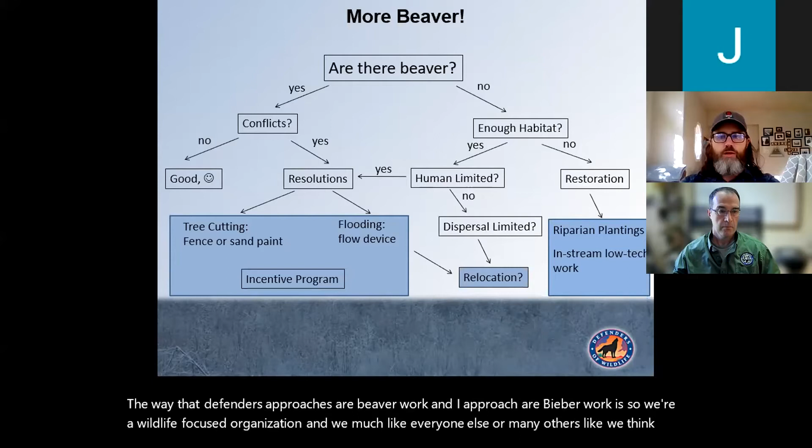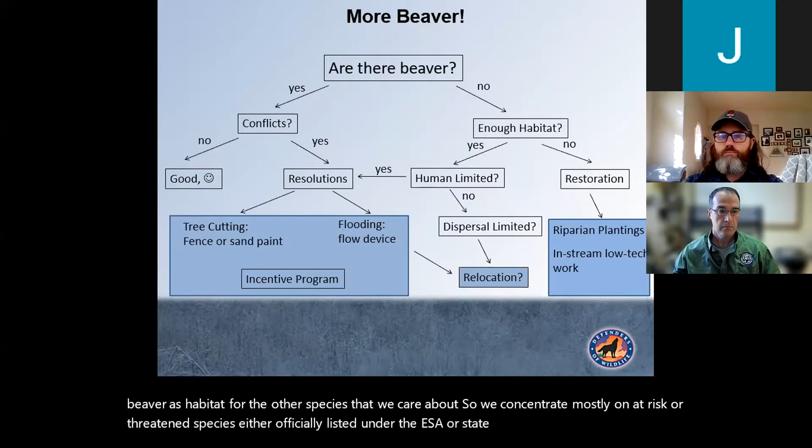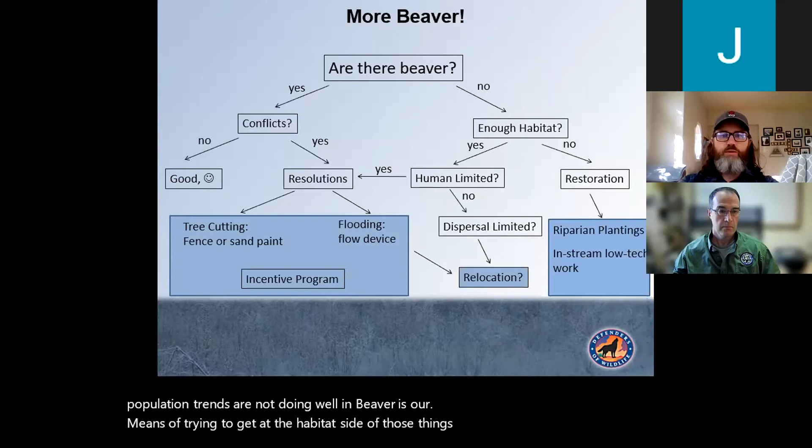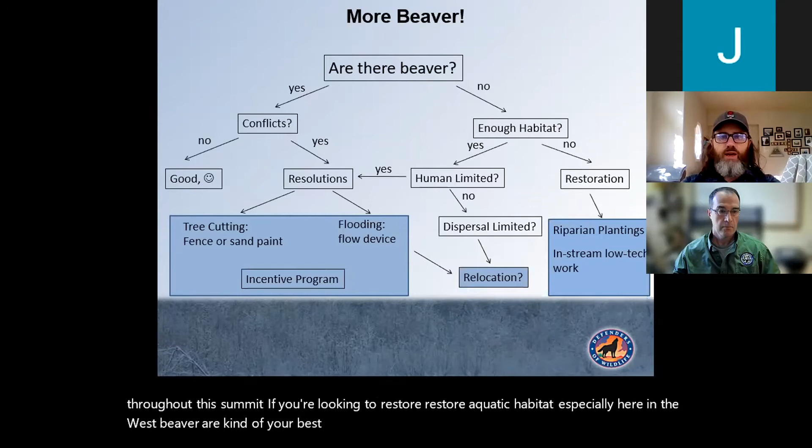The way that Defenders approaches our beaver work and I approach our beaver work is, we're a wildlife focused organization, and much like many others, we think of beaver as habitat for the other species that we care about. So we concentrate mostly on at-risk or threatened species, either officially listed under the ESA or state listed, or whose population trends are not doing well. And beaver is our means of trying to get at the habitat side of those things. Because as we've learned throughout this summit, if you're looking to restore beaver or restore aquatic habitat, especially here in the West, beaver are your best choice, your best ally from both a cost and effort perspective.

So today I'm going to focus mostly on this side of my diagram here, places where we have beaver and we have conflicts, and try to walk you through some of those common conflicts and common solutions as we move forward. And then if we have time, I'll speak a tiny bit about relocation, but it'll be super brief.

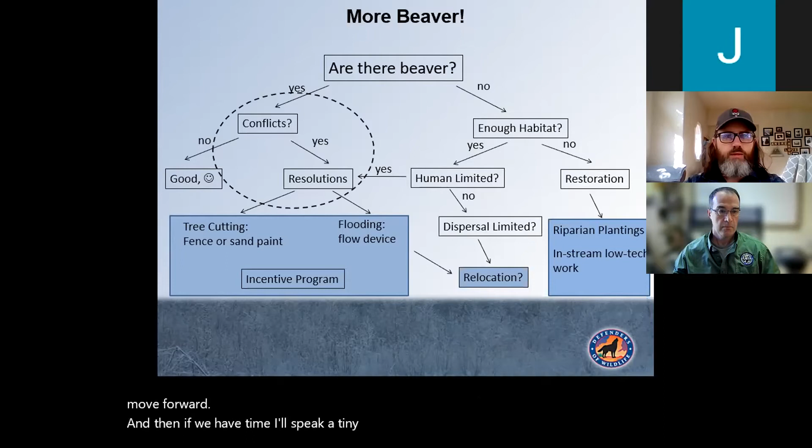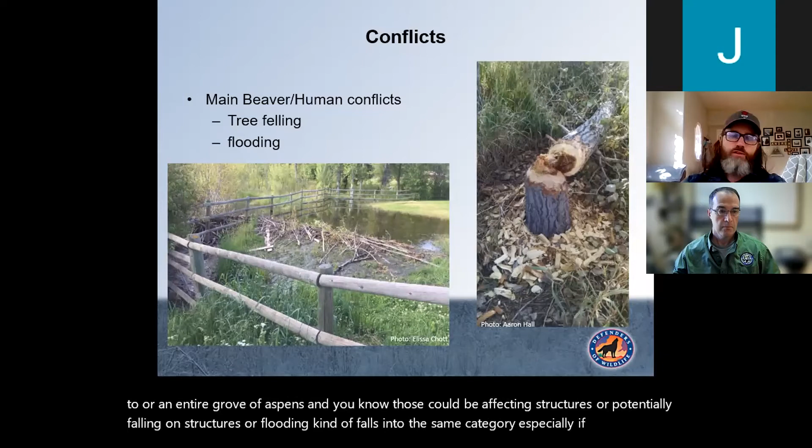So beaver conflicts tend to fall into 2 main categories. It's either tree felling, where they're taking out ornamental trees or trees that people have a personal connection to, or an entire grove of aspens, and those could be affecting structures or potentially falling on structures. Or flooding, especially if you're flooding out infrastructure, such as this picture on the left of someone's backyard being flooded. But let's remind ourselves, why are beaver doing this?

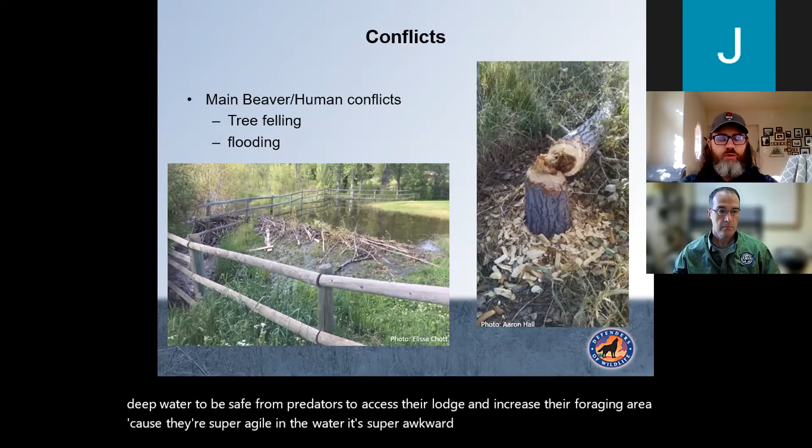Beaver are trying to create themselves a pond, and they want that pond so they can have some deep water to be safe from predators, to access their lodge, and increase their foraging area, because they're super agile in the water and super awkward on the land. So the bigger, deeper pond they can create keeps them safer and gives them more access to forage. It also creates that feedback loop: more wetland area creates more forage and willows for themselves.

So good news on the tree felling side of things, there's some fairly straightforward and simple things that we can do, primarily just fencing. But it does matter, the type of fence that you use. You need a heavy-ish gauge wire, something in the 12 to 14 gauge range. It's going to stand on its own. Chicken wire, chicken fence will not work. They can actually chew through that.

You need to put those fences away from the trunk of the tree so you don't girdle it. Give that tree a little bit of room to breathe and room to grow. In areas where you might get high snowpack, like here in the Rockies, those fences need to be about 4 feet tall. Because if you have a 2-foot fence and you get 2 feet of snow, a beaver can just climb right up on top of the snow and get to your trees. And we do recommend that you stake those fences into the ground so beaver can't get up underneath them and access the trees that way.

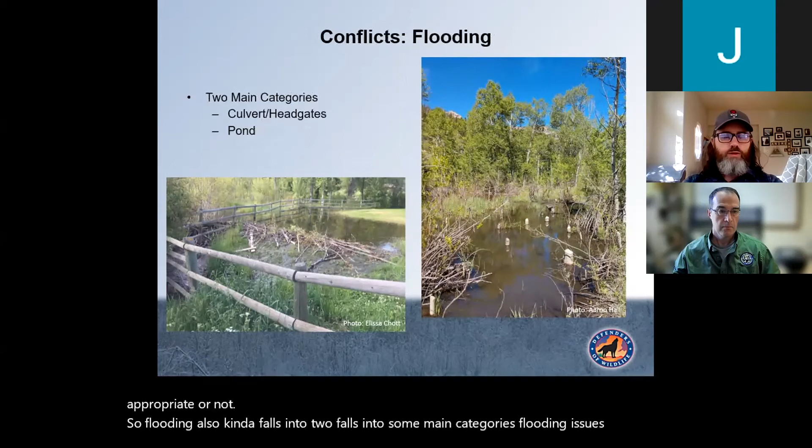So flooding also kind of falls into some main categories. Flooding issues usually either are associated with culverts or headgates, or just general beaver ponds, beaver doing their thing. There are, again, some simple solutions.

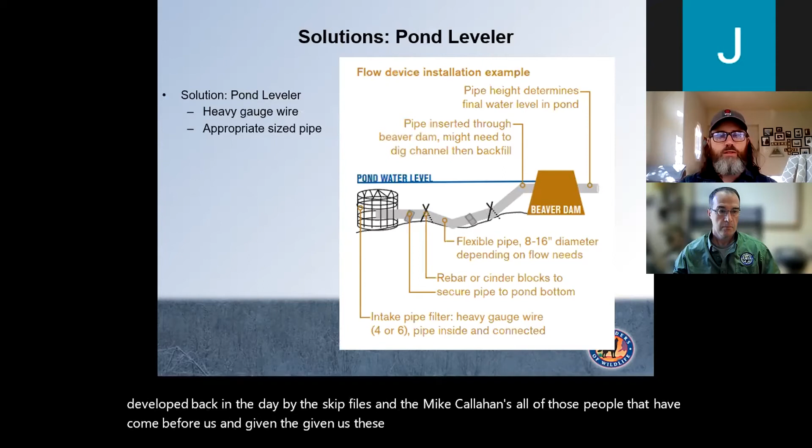And just to point out, all of these solutions and conflict reduction things that I'm recommending are all methods developed back in the day by the Skip Lisles and the Mike Callahans, all of those people that have come before us and given us these methods and tools to work with to reduce beaver conflicts. And I'm so grateful for all of those people that have come before us and everyone working now, building on those principles and advancing the field and really making it more accessible to everyone. So this is just a basic, simple pond leveler device.

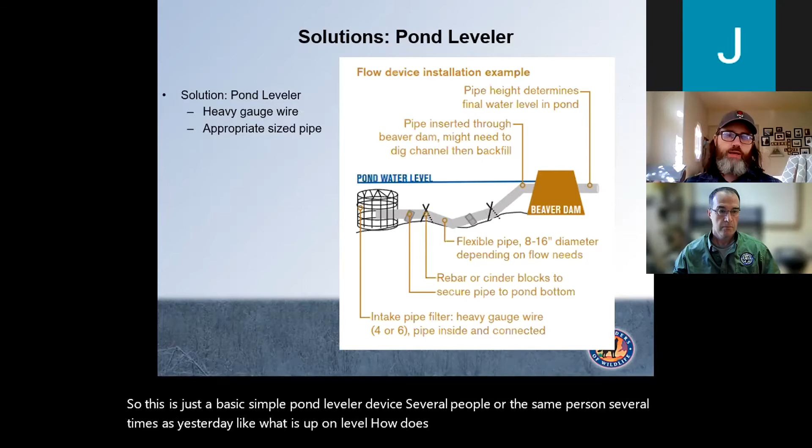Several people, or the same person several times, asked yesterday, what is a pond leveler? How does it work? And as someone responded yesterday, it's basically just a pipe through a dam. But the sneaky part about it is, if you put a pipe through the dam, the water level gets set at whatever level you set that pipe. But then if you put a pipe way out into the pond and put a filter around it, the water is actually coming from way out here in the pond.

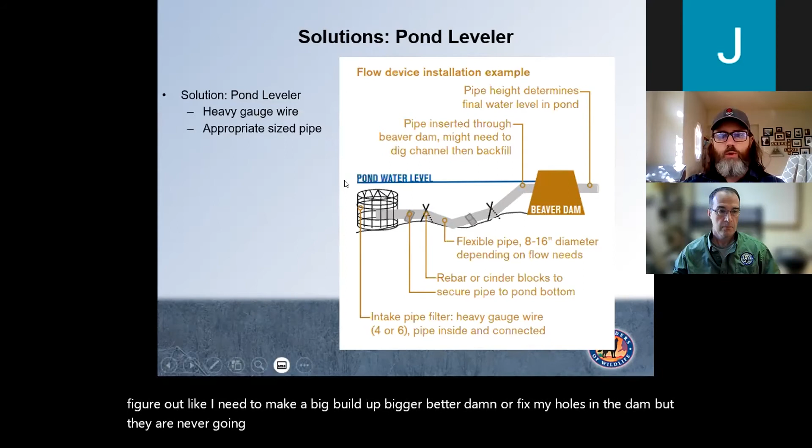So the beaver might do a ton of work at the dam, trying to figure out, oh, I need to build a bigger, better dam or fix my holes in the dam. But they are never going to affect the water level because the water is coming from way out here in the deep part. So that's just how it works. If you put that filter out there far enough and deep enough and with a big enough filter on it, the beaver will never feel it, they'll never find it, and therefore they won't plug it up.

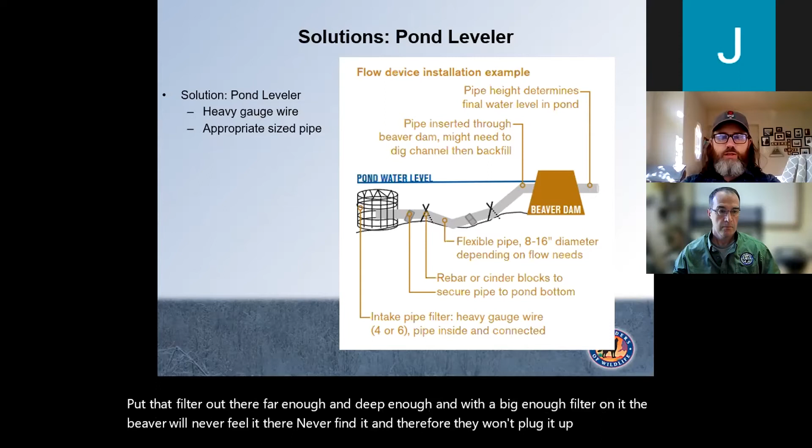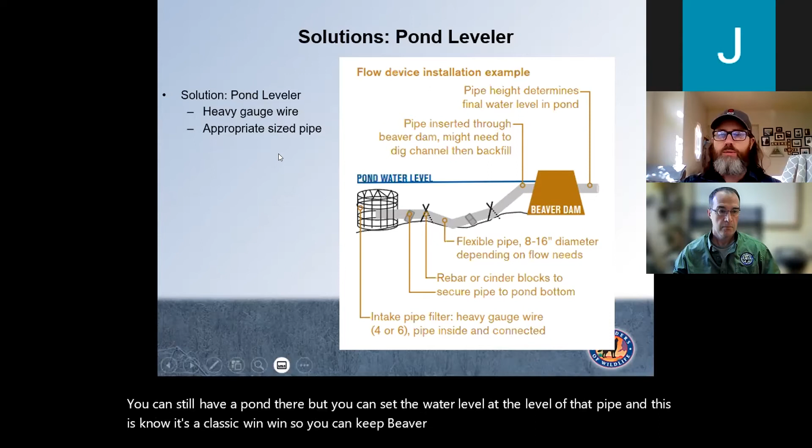So you can still have a pond there, but you can set the water level at the level of that pipe. It's a classic win-win. So you can keep beaver on the landscape, but help to minimize their flooding. And here's a quick example, again, from work up in Montana with NWF and Clark Fork, of a pond leveler being installed. You can see the filter out here. You can see the pipe coming through the dam right here. So it can be that simple.

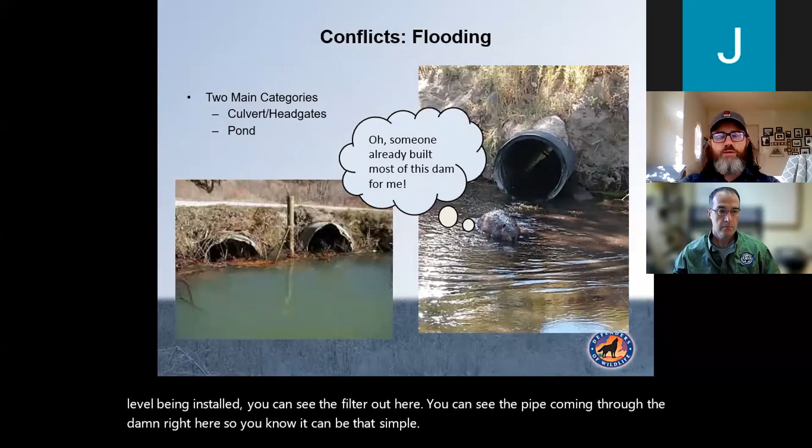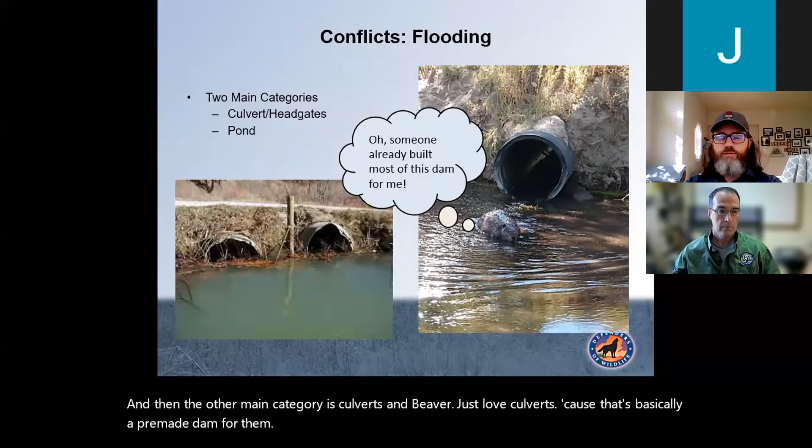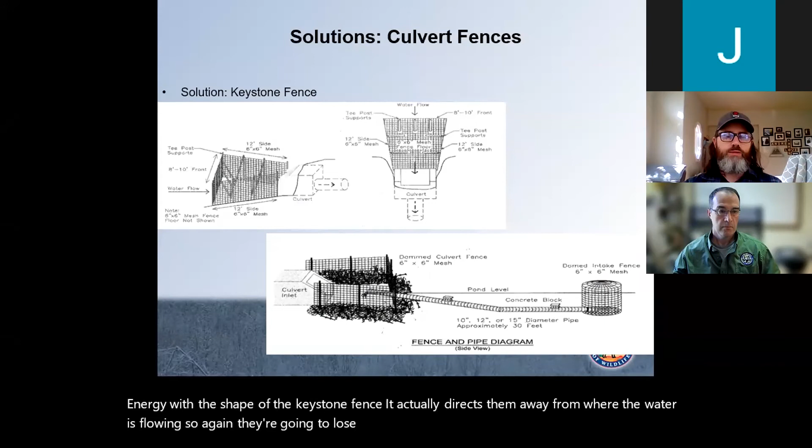And then the fence and pipe situation is just a slight twist on the keystone fence. So maybe you don't have enough room to put in a really big keystone fence, or you're just super concerned that the beaver are going to dam the heck out of it. So that's great. Build them a fence, and they can build whatever dam they want on that fence. And then if you have almost a pond leveler type system connected into that fence, the water is going to come from out in the pond and be protected, and they're never going to find it. So they can build whatever dam they want around this fence near the culvert. The water is coming from way out here in the pond, and they will not find it.

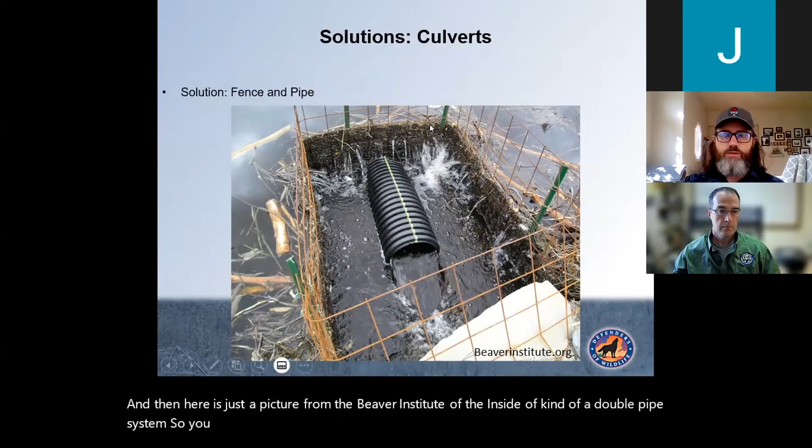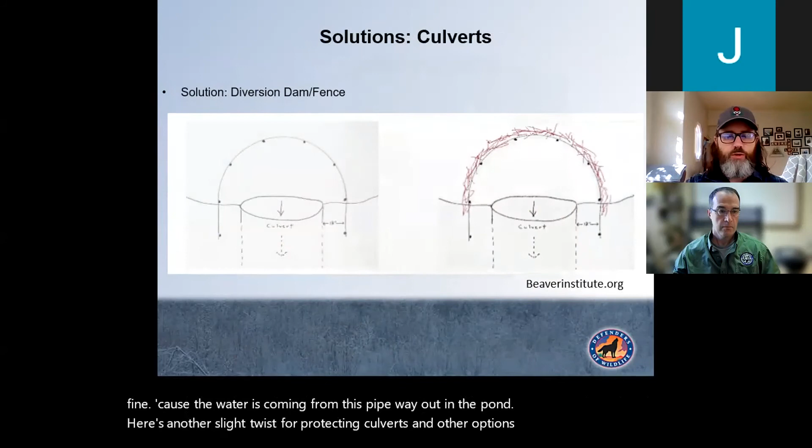And then here's just a picture from the Beaver Institute of the inside of kind of a double pipe system. So you can see the beaver has done a great job of damming around the fence, but that's fine because the water is coming from this pipe way out in the pond. Here's another slight twist for protecting culverts. Another option is to just make the beaver build the dam where you want them to. You can see in this picture, if you build them kind of a starter dam and then get them to continue building on that dam, the culvert actually stays clear because the dam is out here and not blocking the culvert. So yet another solution.

I just want to point out, it's really important that these concepts and these techniques are applied correctly. And it's tricky because the general concept seems simple, but then the application is really site specific. So here's some examples of projects I've been contacted on that are not quite installed properly. This one on the left is kind of a keystone fence, but they decided to build a rock dam on the inside of it. That's not the best practice.

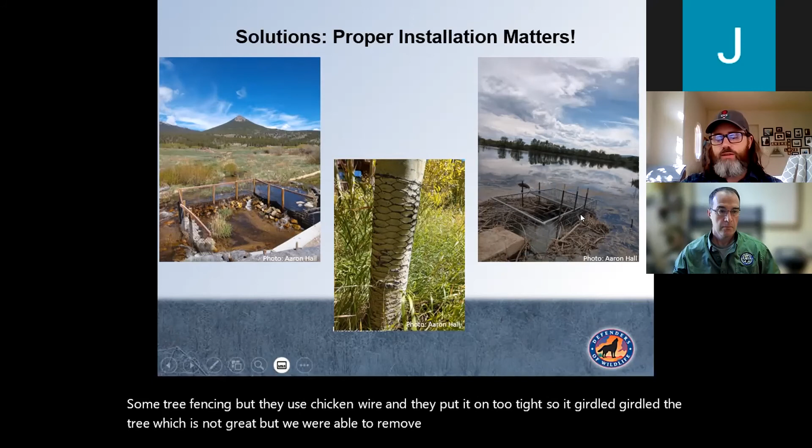This one in the middle is some tree fencing, but they used chicken wire and they put it on too tight. So it actually girdled the tree, which is not great, but we were able to remove all those. And this one on the right is an attempt at a double filter system where they got the fence part right, but they didn't use big enough pipes to put out into the water. And they all clogged up because there were no filters. All three of these have been remedied and they're working well now.

But again, just to point out that it really matters how you install these, because as was mentioned yesterday, and as I feel really strongly, we want to avoid a negative feedback loop of coex. So if people see devices that are installed improperly and not working, they tell their friends and you kind of get that negative feedback loop of, oh, well, these things don't work and we shouldn't bother trying. So it's really important that we have good examples and good installations that are doing what they should and functioning properly to create a positive feedback loop instead of a negative feedback loop.

If you happen to live in Colorado, New Mexico, Wyoming, or Montana, Defenders actually has a program to help pay for these flow devices. So in general, we'll cover half the cost up to a certain threshold of these projects. It just depends how much money I currently have in the budget for these. And that is my way and our way of trying to scale up our impact on the ground. Now, I'm only one person. I work in the entire Rockies and Plains region. I obviously can't be hands-on for every site that needs some sort of coexistence.

So this incentive program is one way that we think we can encourage more use of these devices and scale up their presence on the landscape. So if you want more information about that, please reach out to me and I'll drop the link to this in the chat as well.

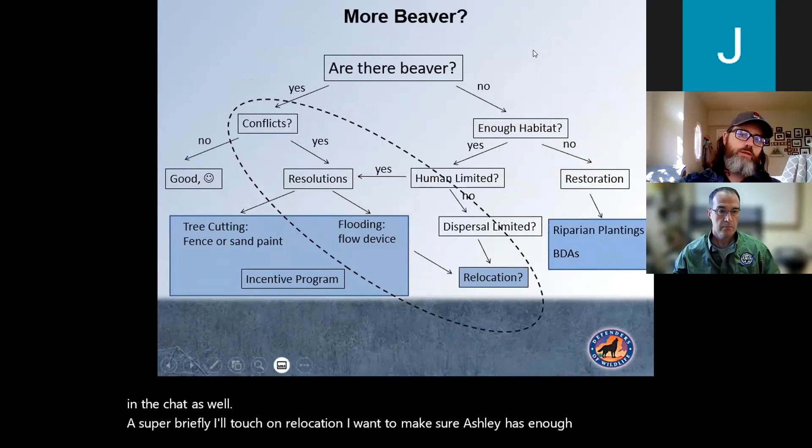Super briefly, I'll touch on relocation. I want to make sure Ashley has enough time as well. So in instances where there are conflicts and there are resolutions, but maybe resolutions that don't make sense, relocation is an option. But I always think of relocation as a tool in the toolbox, but maybe the last tool in the toolbox that we should get to, in instances where coexistence is just not possible and natural dispersal is unlikely. And for all the reasons that Mark just touched on, especially here in Colorado, there's a permitting process that can be lengthy and intensive and for good reason.

But it might be a strategic opportunity where you can take individuals that would otherwise be lethally removed. If you can get the matchmaking game to all work out and find an approved place to put them, it can all work out wonderfully, but it is very labor and time intensive, but it is an option.

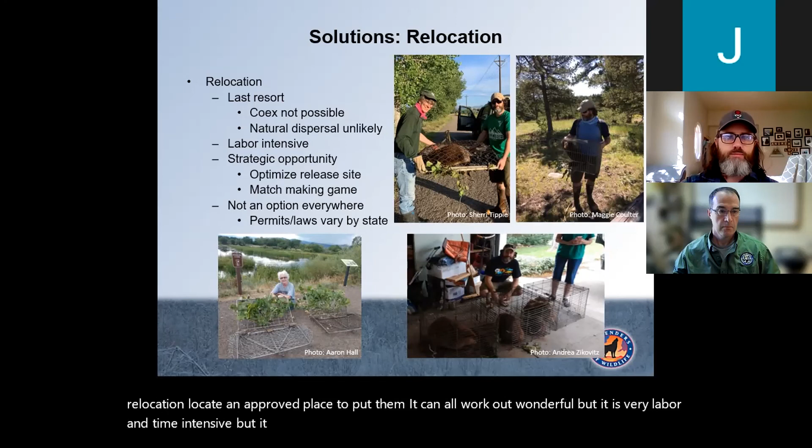As far as other resources, I highly recommend that anyone interested in coexistence or beaver in general go look at Mike Callahan's Beaver Institute website. Mike's been doing a wonderful job on all things beaver, and he has created the Beaver Institute to put that knowledge out there and train others in installing these devices. He has a Beaver Corps training program that several people are a part of, where he's instilling his knowledge on these people and increasing the amount of people out there that have the knowledge base to install these coex structures, which is wonderful because that's currently a limiting factor in my opinion. We just don't have enough knowledgeable people out there available to install these things.

As was mentioned yesterday, great resources. If you're interested in all things beaver, just looking to get some easy reads, go find Eager, go read Once They Were Hats, go read Ellen Wohl's new book. If you want to deep dive on more details, go into the restoration guidebook from the US Fish and Wildlife Service. That's wonderful, and it has a million links in there.

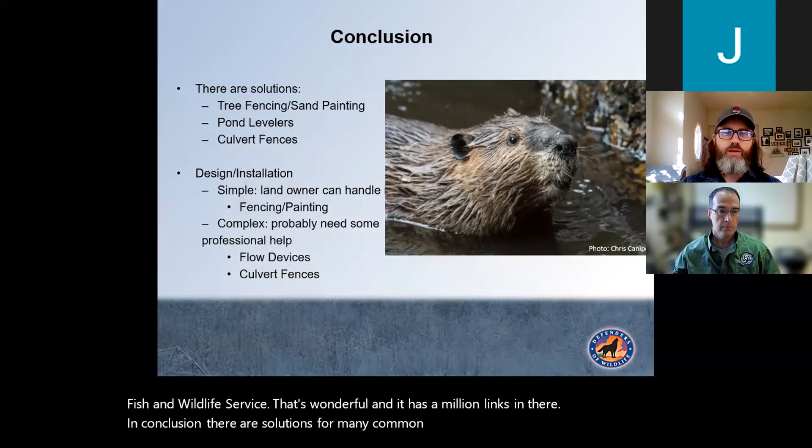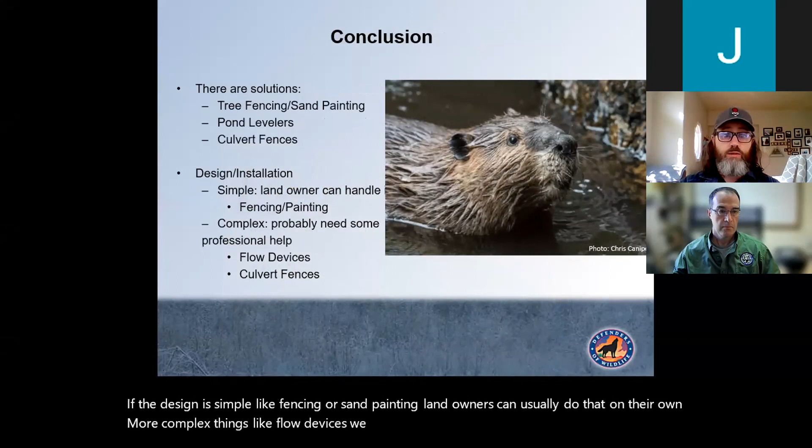So in conclusion, there are solutions for many common conflicts: tree fencing and sand painting, pond levelers, culvert fences. Everything is site specific, but usually it can be figured out. If the design is simple, like fencing or sand painting, landowners can usually do that on their own. More complex things like flow devices, we do recommend that you contact an expert with the knowledge base and the training to really help install those. And again, to make sure that they're installed correctly and that they're functioning properly.